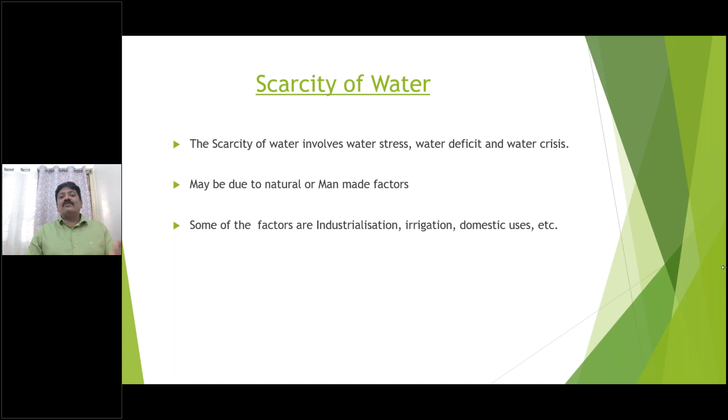Today we are talking more and more about the scarcity of water. Why is this scarcity happening, and what are the remedies? We are going to address these things today. The scarcity of water involves water stress, water deficit, or water crisis. This may be due to natural phenomena or man-made factors. Some man-made factors are industrialization, and erratic use of water in irrigation, domestic purposes, etc.

And I have seen that the water table is falling drastically. Here we have already gone about 1,500 to 1,800 feet below. And though we have completed 5 stages of the Kaveri project, still we are not able to supply water to the whole of Bangalore city, and we have a severe water crisis.

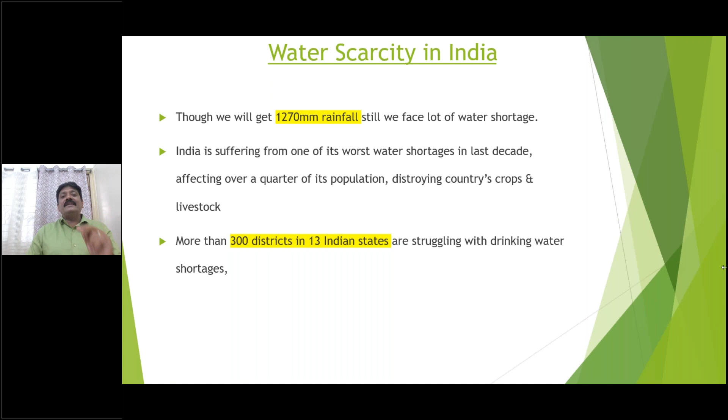In the last decade, India has faced a lot of water crisis, affecting at least a quarter of India's population, destroying crops and livestock. More than 300 districts in 13 Indian states are struggling with drinking water shortage, which cannot be compared when we talk about such water stress. You can see that 54% of India's landmass is under acute water stress.

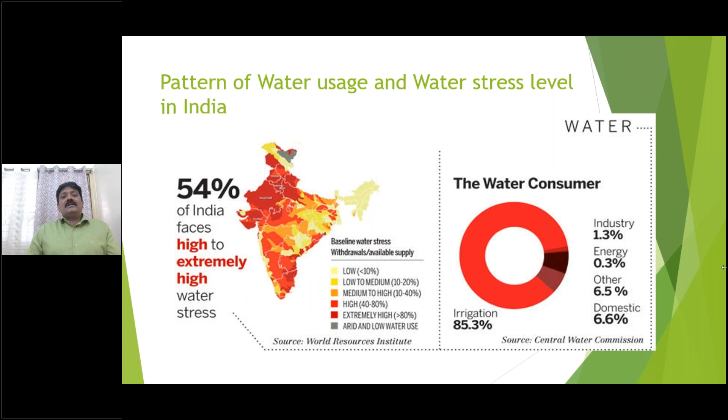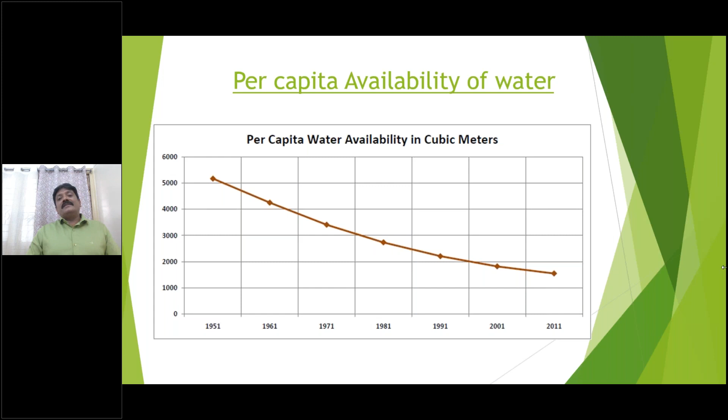If you take per capita availability of water during our independence, we had about 5,000 plus cubic meters of water available per person. But it has been continuously decreasing, and by 2011 and 2017 it came down as low as about 1,500 cubic meters. Anything below 1,000 cubic meters is a distress level, and it will lead to a lot of water crisis throughout the country.

What are the reasons for water scarcity in India? Though we are getting 1,270 mm of rainfall, what is the reason we are facing this?

You will be surprised to know that of all the rainfall falling on the land in India, with all our dams, tanks, and ponds put together, we are only able to save 35% of the water that falls on our land, and 65% of the water goes to waste. That is because we are not able to manage this water, and due to over-exploitation of surface and groundwater. Also, due to rapid construction, we have reduced all the traditional recharging structures.

In agriculture, which uses the largest amount of water, 85% of fresh water is used by agriculture. And they are using this water inefficiently with furrow irrigation systems, where flooding of water leads to wastage.

And what has happened is, whatever water is left in the ponds, rivers, and lakes, we have polluted them by draining all the waste products into the water, along with water treatment effluents into the fresh water, and discharging chemicals from industries.

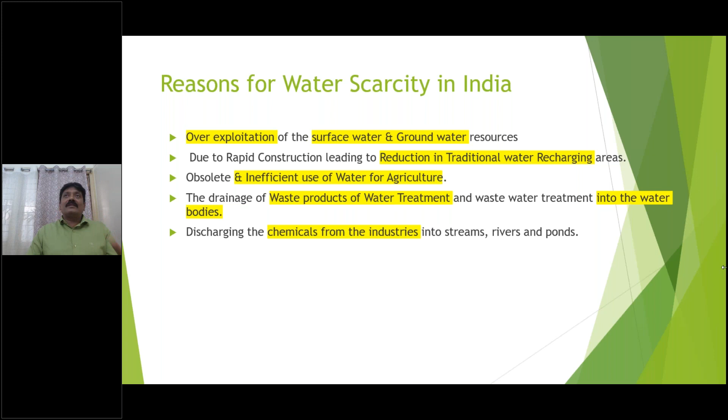You must have seen a recent news story that went viral worldwide: a lake on fire. Unfortunately, it was from my place, Bangalore, because a lot of effluents were sent into the lake, and the lake caught fire. This is the kind of misuse and abuse we have been doing with fresh water.

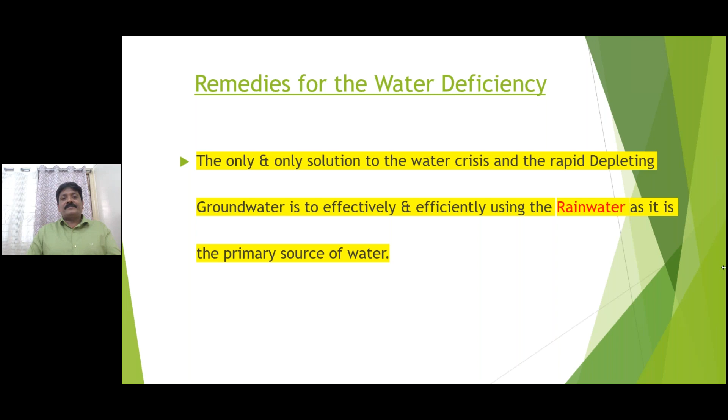For all this water shortage problem, the only solution is to use rainwater, because rainwater is the only primary source for all the water in the world. So, in case we want to make the country water surplus, or at least water positive, we have to take up rainwater harvesting on a massive scale. Each and every house should adopt it at a massive scale.

Though rainwater harvesting has been made mandatory by many states, people have not taken it seriously because they have never seen rain as a source of water. They have not thought that rain is a resource for water, so they have failed to adopt rainwater harvesting. In many places, people have found shortcuts just to show it to the authorities so that they can save on fines.

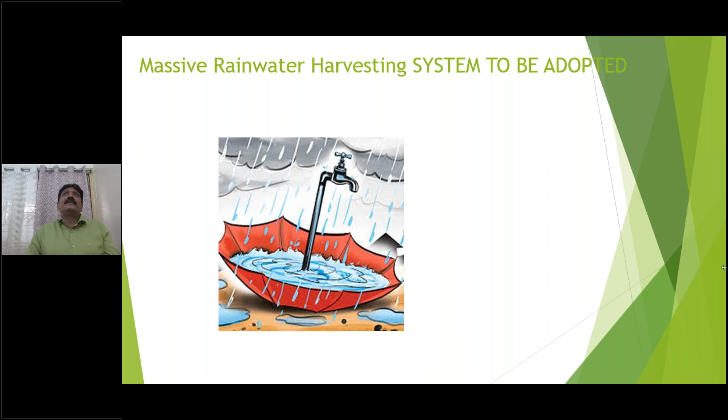But if they can adopt rainwater harvesting, I will tell you the benefits of adopting it, how it can benefit a person, a country, and the mother earth as a whole. Just to give you an example of how much rainwater potential there is, in Bangalore we get about 1,250 MLD of water per day from the Kaveri river.

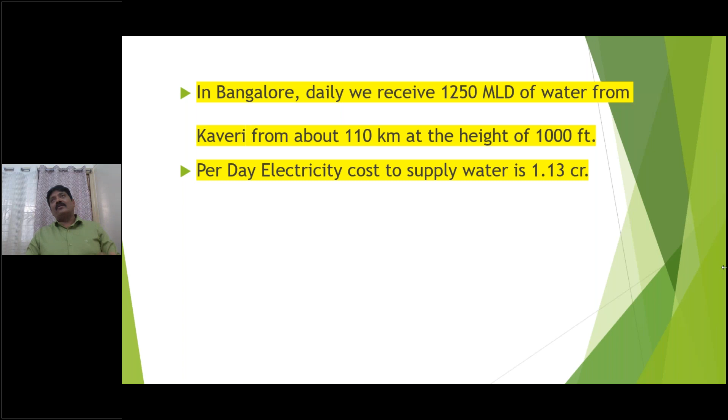This water is pumped from about 110 kilometers away, at a height of 1000 feet. We are about 1000 feet above the source of our water. Per day, the electricity cost to supply water to Bangalore is 1.13 crores.

But just to give you an example of the potential of rainwater, let's assume we cover the whole of Bangalore with a plastic sheet, and the water that falls on it is collected and stored in ponds. You must have read that Bangalore was once called a city of lakes. We had more than 1000 lakes, and today we're left with only 97.

This is not only for Bangalore. Any city, even getting just 500 mm of rainfall, if able to collect, store and recharge its rainwater, will be able to supply water from that source alone. You need not supply water from a long distance, spending huge capex on infrastructure, maintenance, and power bills. All this could have been saved and used for a better purpose, if we understood the importance of rainwater.

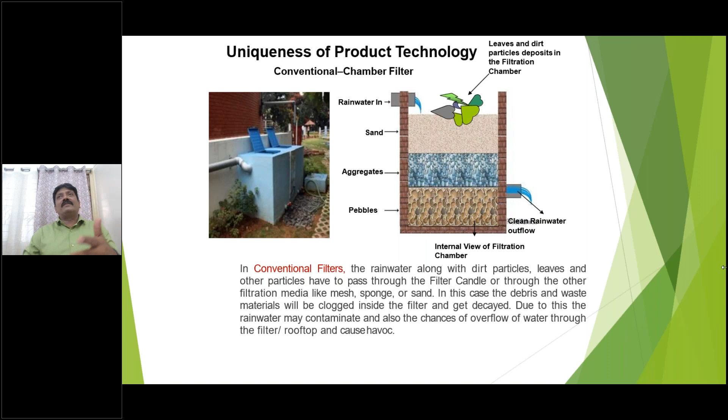Rainwater harvesting is actually a very simple process for a house. We need to interconnect all the downtake pipes and connect them to filters available in the market, which are self-cleaning and maintenance-free. After filtration, this water can be let into any underground sump, bore well, or open well you have.

It's as simple as this, and you'll be surprised to know that for 1200 square feet of roof area, the whole installation cost, including plumbing, pipeline and the filter, may come to about 20,000. If you take the average annual rainfall of India, about 1270 mm, annually we'll be able to collect about 1,20,000 liters of water, which can reduce stress on municipal supplies.

Imagine if we could have saved that much water, how much we could have saved on the water bill. As an individual, we could have saved on the water bill, and that much water wouldn't have gone into the storm drain.

Just to give an example of how urban flooding happens, let's assume a street with 20 houses on one side and 20 on the other, each with about 1200 square feet of roof area. For just 25 mm of rainfall, or 1 inch, one house will yield about 2400 liters of water.

If that 2400 liters per house is let into the storm drain without being harvested, one side of 20 houses comes to more than 48,000 liters, and the other side another 48,000 liters. In one street of just 40 houses, that's around 1 lakh liters - imagine the colossal quantity of rainwater getting wasted. This goes to low-lying areas, causing loss of lives and property.

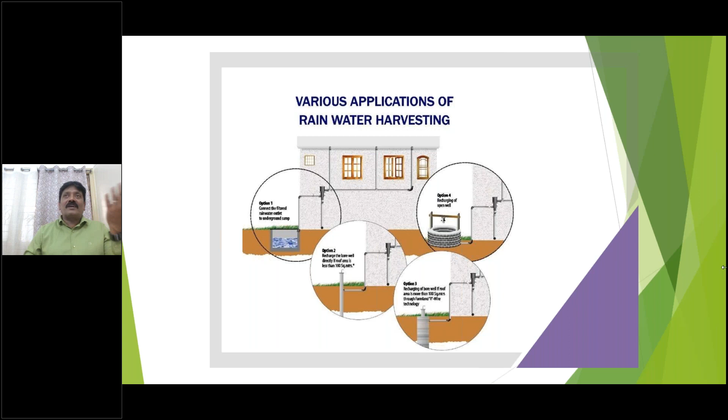It is a simple installation. We just need to interconnect all the downtake pipes, bring it together, and install any of the self-cleaning filters, any good filters available in the market, and allow the water to be stored. The quality of this water, compared to any other water on earth, is the best water. This water can be stored if you filter the rainwater and don't allow sunlight and air to interact with it.

This water can be stored for a minimum of 100 years. I say minimum 100 years because that is the known time for which water was stored and remained potable. One haveli in Jaisalmer was locked for 100 years, and when they opened it, they found water still in the tankas below.

If you take the Jaisalmer, Rajasthan desert area, and the Kutch area of Gujarat, every house there has a tanka below their kitchen. All the rainwater that comes, they collect it, filter it, and store it in their tankas, using it for drinking and cooking because they don't have any other perennial source of water.

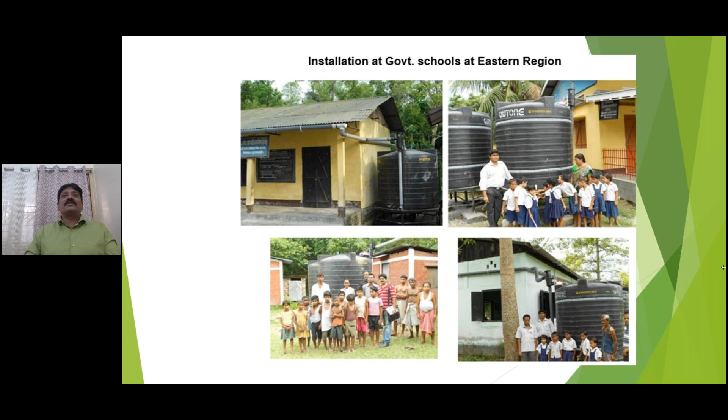When the water from that haveli, closed for 100 years and then opened, was tested, it was still in potable condition. That is the reason I'm telling you rainwater can be stored for 100 years in potable condition. You'll have observed that water retrieved from borewells is millions of years old—that is fossil water. In fact, that is still good; they say it's the best water to drink.

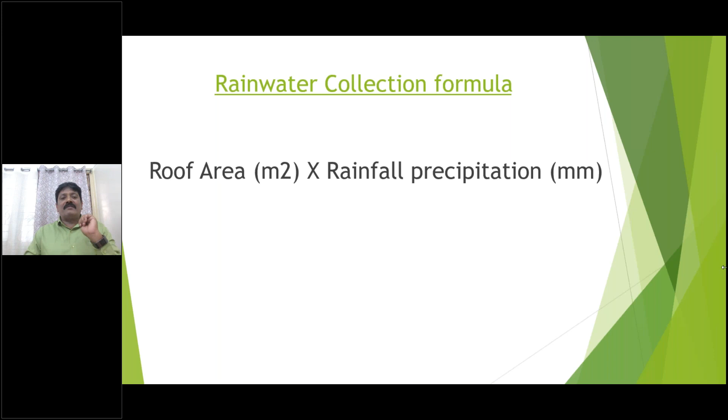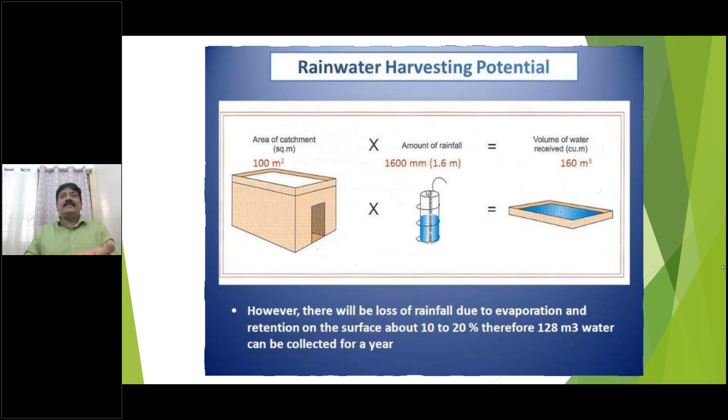Now, for a layman to understand, let's see how much water comes onto my house. It's a very simple formula: calculate the roof area in square meters and multiply it with the precipitation of rainfall, which you can get from the meteorological department or Google, since many sources are available today. Take the catchment area of your roof and multiply it with the rainfall, whether per hour, per day, or per year. This gives you the amount of water falling on your roof and going to waste.

So you'll understand how much precious clean water is going waste from your house alone. Even without installing huge underground sumps, just using the existing facilities in your house, you'll be able to save more than 35 to 40% of your annual water requirement. Anywhere on earth, with minimum investment and without extending your storage capacity, using whatever storage you already have, you can reduce your consumption by a minimum of 35 to 40%.

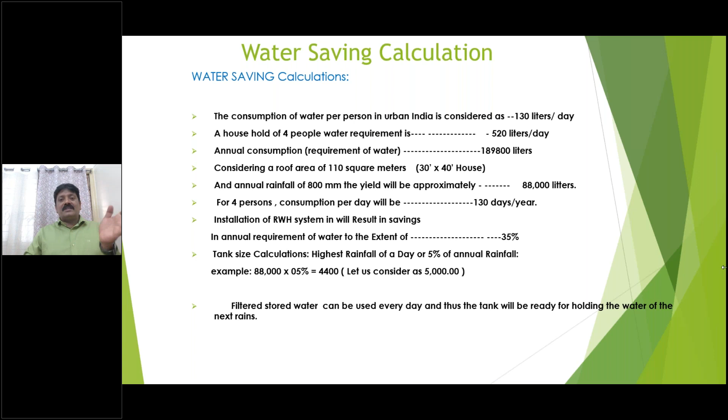In Bangalore, there are many houses that don't depend on grid water at all. They don't have borewells, nor do they buy water from the municipalities—they just live on rainwater alone. If they can do it, probably everybody can do it. We just need the determination to do it.

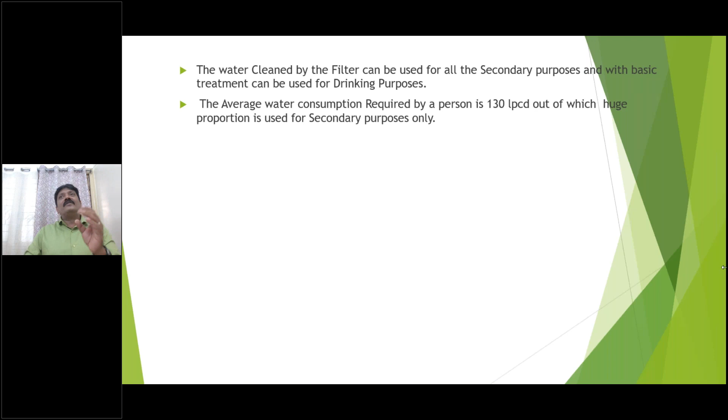There are many other ways we can save water at the individual level, because I'm talking to all of you today about how we can save water individually. The foremost important method is rainwater harvesting, which we can do with just a small investment of as low as 20,000 rupees for a house. If you're building a new house, you can also go for grey water usage for flushing. What's happening is, per day per person, we use about 40 liters of water just for flushing alone.

This is drinkable quality water which is coming in your tap, which you are using for flushing, which is a crime. We could have used all our bathing water, the water from your washrooms, your hand wash water, and your washing machine water. With simple changes in the plumbing system, this could have been used for flushing, giving one more lease of life to this water.

In bigger apartments, this gray water mixes with the sewer water, and then the whole STP capacity has to be increased. STP is sewage treatment plant. With that, capacity has to be increased, so there is a lot of consumption of chemicals and power, and this water is getting wasted.

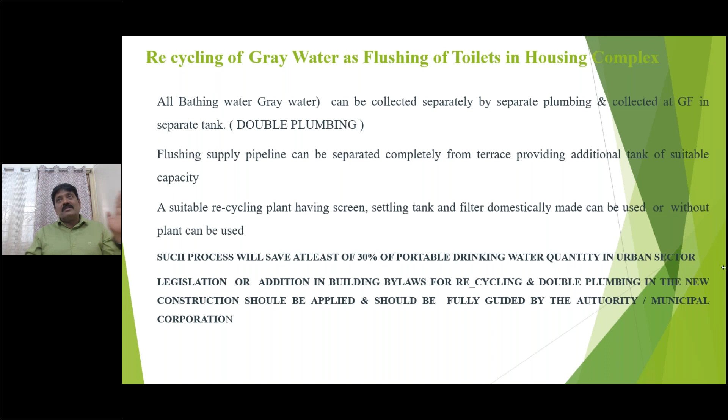Instead of that, if you could keep the sewer water line separate and the gray water line separate, you could give one more lease to that water, and this can reduce huge cost in treating the water, majority of the cost. This will also reduce your consumption, because on average, international standards say we consume about 130 liters. If you remove about 40 to 45 liters, you're left with only 90 liters of water to be used.

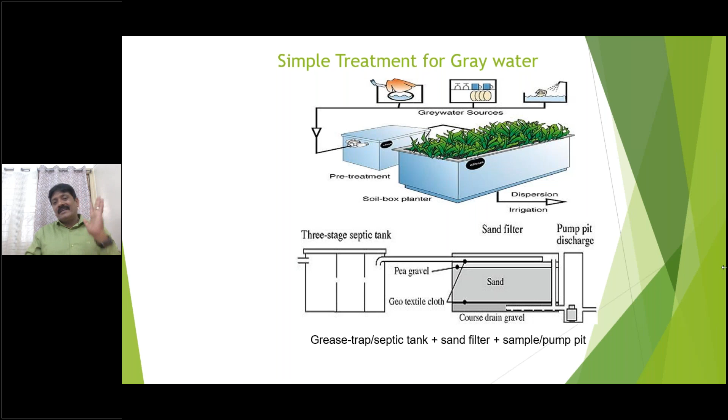This can be used for your flushing as well as your gardening. Then you don't require a very high sophisticated filter. A simple activated carbon charcoal filter will take care of the cleaning, and this water can be used.

One more simple thing we can do tomorrow morning is adopting aerators for all the existing taps. What happens is, in the taps, there is huge water wastage. Particularly in apartments, if you have a 10-storied apartment, the pressure will build up by the time you come down, and the water will be gushing out of your tap as soon as you open it.

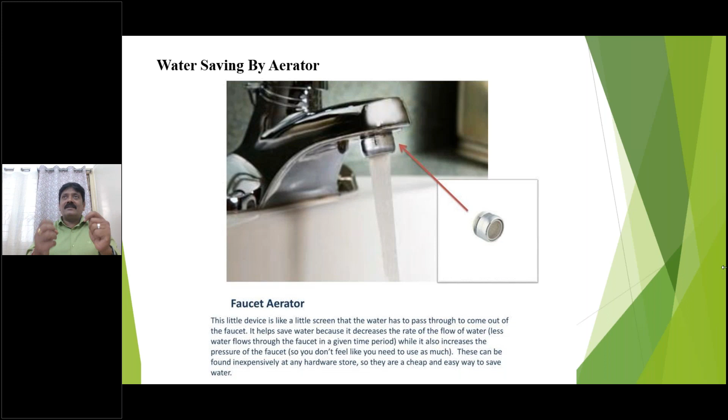So what you can do is, there are a lot of aerators available today which take air and mix it with water, reducing your water consumption in a very big way.

These are retrofit, and can be installed on any of your taps, particularly your kitchen taps where the maids wash utensils. It's common practice in everybody's house that the maid will leave the water running, and by the time she enters the kitchen, starts cleaning, and goes out, the tap will be running full this whole time.

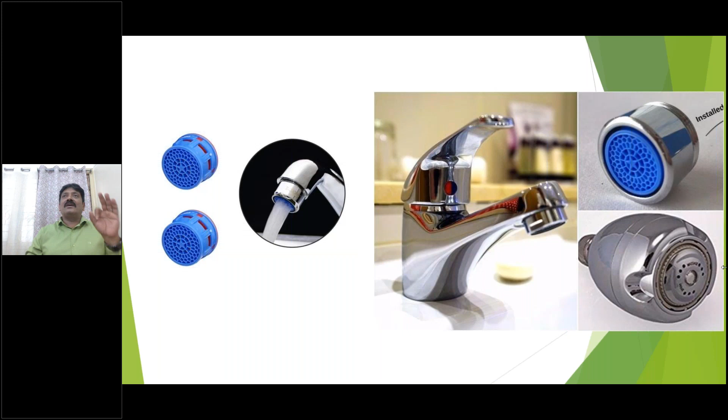So we can adopt aerators there, and in our showers too we can take shorter showers. You can see the difference here: a tap without an aerator will use 15 liters of water in 1 minute, whereas if you install a small aerator costing about 45 to 60 rupees, only 3 liters of water is used. So you are using 80% less water, and you won't even feel the difference.

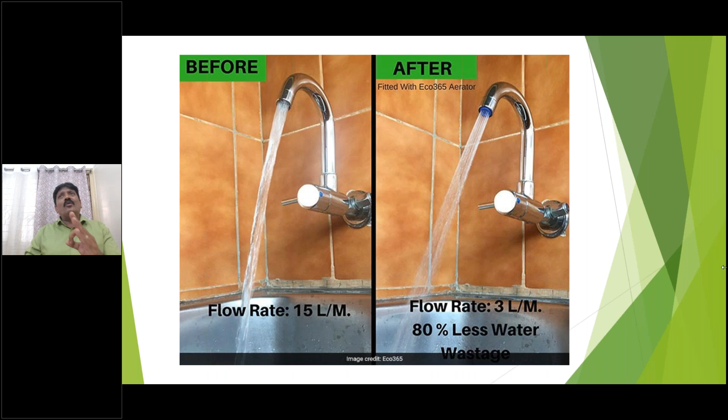It's not that your hands won't be washed properly; you'll be able to wash your hands in the same manner as with 15 liters, because we only require that much water to wash our hands. The rest of the wasted water that would have otherwise gone down the drain can be arrested, and this will go a very long way in saving your water bills.

Second is taking up the permeable pavers. If you just go outside and look around, each and every inch of available land is covered with either tar or paver blocks. There is no place for the water to percolate into the earth at all.

It is unfortunate that even school grounds these days use paver blocks or synthetic mats to cover playgrounds. It's so unfortunate - we call ourselves the most advanced in terms of technology, but it's unfortunate to tell you that our forefathers were more literate in water literacy than we are today.

If you see, each and every temple has a temple pond. There were so many open wells, so many kalyanis. They knew so much about water saving, which we have forgotten today. This is only in the last 30 to 40 years that we have gone to this extent.

If you take borewell culture in India, it started in the late 60s and early 70s, and we thought that borewells were infinite. Today, after 40 years, we are coming to know that this is not true.

In my place, Bangalore, out of 10 borewells drilled, we get water in only 4 borewells, and that too at a depth of 1,500 feet. Cost of drilling a borewell alone comes to about 3 lakh rupees. Imagine if you don't get water in that borewell, what is the status of that person? Out of the 4 borewells where we get water, in the first year of operation, 2 borewells dry up. So our strike rate of water has come down to as low as 20%, and this scenario is everywhere.

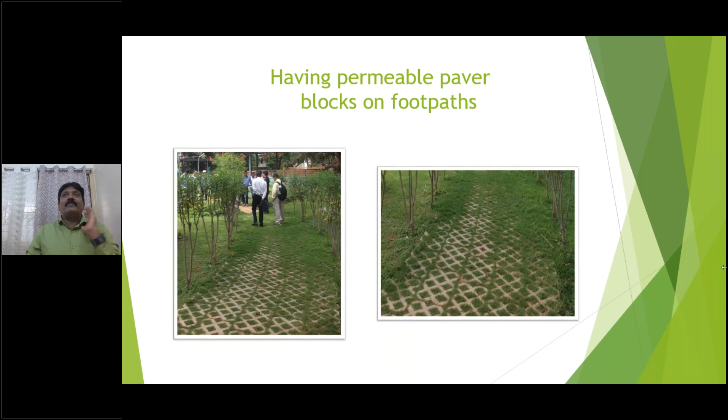Even in the Gangetic belt, where we had water at a sub-shallow level of 10-20 feet, today the water is at 200-300 feet. This is happening in every city. In the Gangetic plains, where we would have never dreamt of seeing tankers, today you can see many tankers going around. So slowly we are getting into a phase where we'll have a water crisis.

These are a few small methods which we can use in our houses to save water, thereby reducing our cost of water as well as doing a human service to Mother Earth.

In India, about 75% of our population is somehow directly or indirectly connected to agriculture. And out of the fresh water used in this country, more than 75% is used for agriculture, because of our practices which are not in favor of conservation.

Power is generally given free to all the farmers. So what they do is switch on the borewell at night and go, and the whole night, as soon as power comes, the borewell will run until morning. When he comes back the next day, the water will still be flowing, or until the government stops the power. So throughout the night they just allow the water to do furrow irrigation. By furrow irrigation, even though the plants don't need water, the water keeps flowing, because he is not bothered about doing the best irrigation practices.

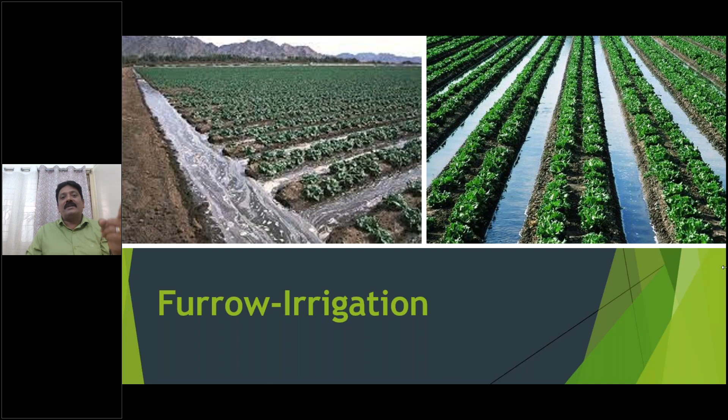That being the case, it is not only spoiling the water, but it is spoiling the soil also, and the productivity of the farmer is coming down.

So what we can do is, like Israel did, go for drip irrigation and sprinkler systems, which will reduce consumption by more than 60%. After the green revolution we had lots of challenges for food security, but today we are facing the water security of the country, and this water security will lead to the food security of the country also.

If we don't have water, how will we grow crops? By putting a lot of water, we are destroying the soil, and that will lead to a reduction in the crop. So it is all interconnected — water is interconnected, and everywhere water is needed.

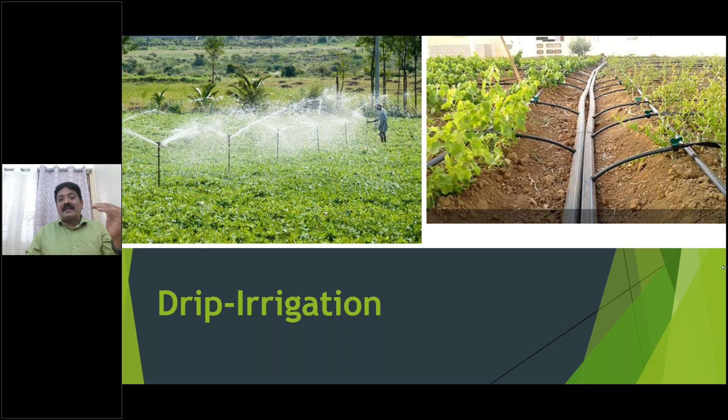In our body also, like in the Panchabhutas, water plays the second place. Out of these 5 elements of life, water is in second place. So water is very important, and a lot of improvements have been done today, wherein you just have to water the root zone.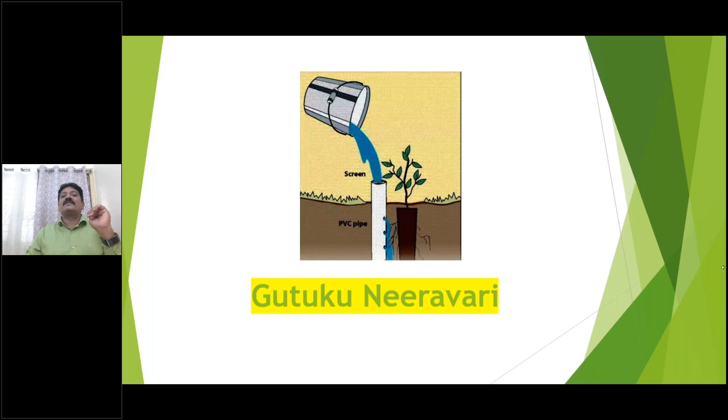We can also have farm ponds in every farm. For 1 acre of land, just 25 mm of rainfall brings 1 lakh liters of water onto the farm. Out of this, hardly 20% percolates because of the clay mix soil at the top. And second, if you see over the last 10 years, the intensity of rainfall has changed because of climatic changes.

Because of that intensity, in a short span of time there is a huge spell of rainfall. All this water will flow off, because only when the water is falling slowly can the earth take it in. Water in the earth moves by capillary action, from higher concentration to lower concentration, very slowly. It is not that it will flow like it goes in a pipe.

So if you can have farm ponds and save this water, for those many days at least you will not need to take water from the deeper aquifer. We can save this water not only by storing it, but also by stopping it with check bunds. By doing that, we see that the topmost fertile soil, which is hardly 8 inches, is stopped from flowing away. So this is a dual system, wherein you save the water and also save the precious topmost fertile soil.

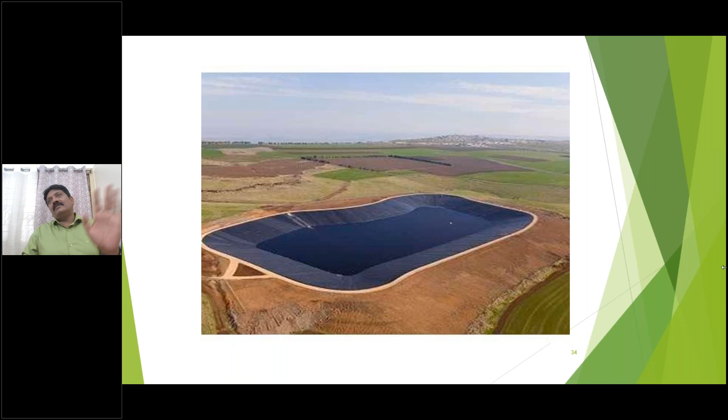Now a lot of technologies have evolved in the last 10 years, wherein you use farm ponds with high density polyethylene liners, which are then closed so that evaporation losses and percolation losses are avoided. Then you can get one or two crops from this stored rainwater alone.

Apart from that, whatever traditional dug wells or open wells were there, we have forgotten them completely. In my childhood days, it was only the open well from where each and every person used to remove water, either for drinking or irrigation, and they were used to it. So what has happened is, after the advent of the borewell, we have completely forgotten these open wells. We have made them into waste pits, or we have closed them.

Now, how important are these open wells in saving water? What happens is, after one or two rainfalls, the whole subsurface gets saturated, because we are not removing this water from the subsurface, we are just removing water from the deeper aquifer through the borewell. Earlier, there were open wells everywhere, so people used to remove water from these wells, and the subsurface water would get emptied. So again, the subsurface would be ready to take the water inside it.

That is one of the major reasons even villages are getting flooded today, because we have stopped using this subsurface water.

And let me tell you friends, subsurface water is the purest and softest form of water, because as we go deeper in the borewell, the quality of the water deteriorates. There are a lot of salts, hardness increases, salinity increases, there will be arsenic, fluoride, all these things. But well water is the softest water, which is required for your farm as well.

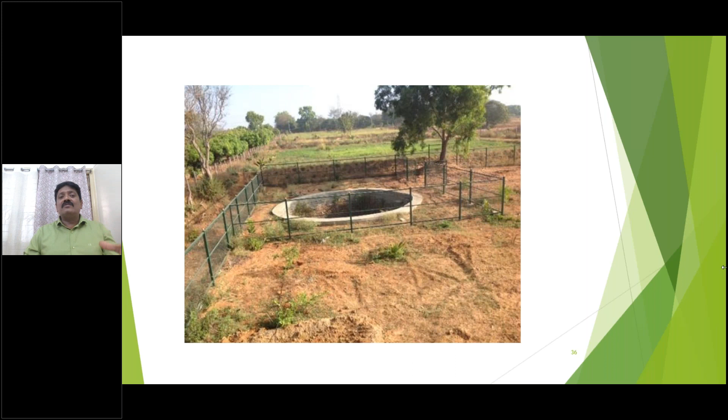So we should advise farmers to have these open wells and farm ponds, which give fresh water, helping their crops and increasing productivity too.

And one more thing, these are the Kalyanis. If you see, each and every temple had a temple pond. But today, if you go to any temple pond, it is either closed, or a lot of muck is lying there. As I told you earlier, our forefathers were so water literate, they knew how to save water. That is how they used to save it, and this was a reservoir in case of drought.

So we should see that all these Kalyanis can be rejuvenated. This is one of the Kalyanis which was more than 150 years old.

This was personally rejuvenated by me on the last World Water Day and inaugurated. If I had shown you the picture of what it was before, and what we made with the help of the Rotary Club Bangalore Basavanagudi, you'd see we rejuvenated it, and today it is full of water. And believe me friends, today it is such a recreation spot.

As you know, water gives such positivity. You go and stand there, why do we go visit all the beaches and seas? Because water, we are connected to it, since 70% of our body is made up of water. So there is a connection. As soon as we see a water body, we feel so positive, that is the connection we have with water.

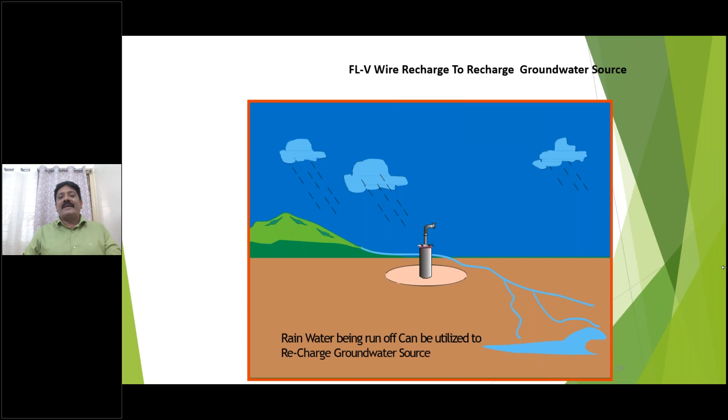And we can even recharge the borewells. We have been digging borewells and forgotten to recharge them. That is the reason borewells are drying day by day. We can recharge these borewells in a big way.

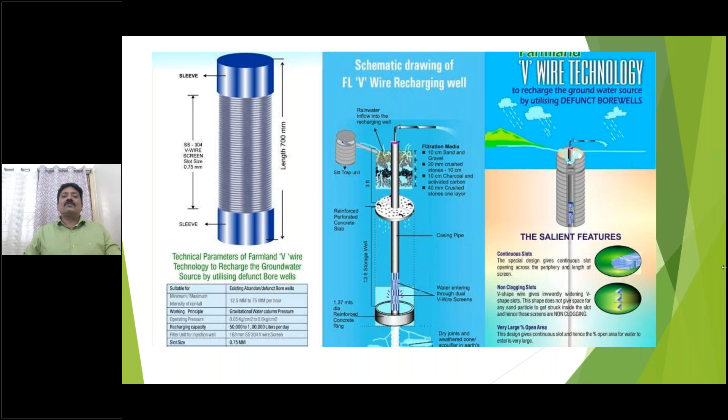We can use this water with different technologies available, like V-wire injection wells, which can be used to recharge the borewell, so all the runoff rainwater can be recharged into the borewell, and the borewell can be rejuvenated. We can improve not only the quantity but the quality of borewell water, because of dilution, since rainwater is the purest and softest form of water. We let this water in after filtration. If it's roof water, you can allow it directly into the borewell, or if it's surface water, you go for the injection well technology, where beside the borewell you bypass the overburden of clay and the non-permeable zone, go to the first permeable zone, and leave the water there after filtration, not into the aquifer itself. This can recharge and rejuvenate our dried and depleting borewell.

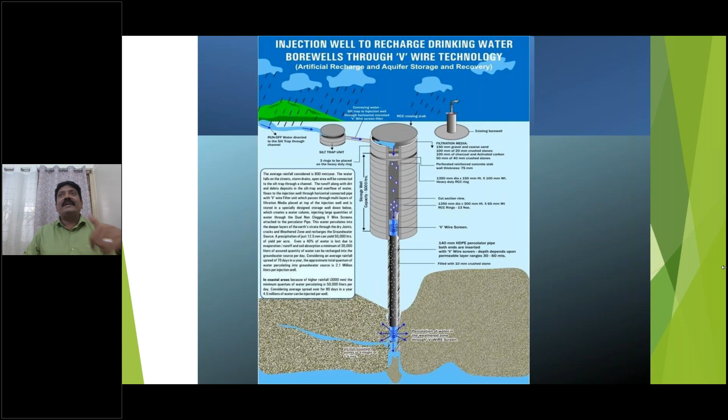Whichever borewell was giving water, if we adopt scientific technology, we can rejuvenate it back and give life back to these borewells.

In this picture you can see the water otherwise would have gone down because of the gradient, flowing away. This is the borewell where my cursor is, and this whole water wouldn't have recharged this borewell at all, because whenever it rained, all the water would have flowed down due to the gradient.

Now, by adopting these innovative technologies, you can see we have made a silt trap here, and all this water is allowed to percolate into the ground to the first permeable zone. Thereafter, it gets filtered through the earth's crust, and this recharges the borewell.

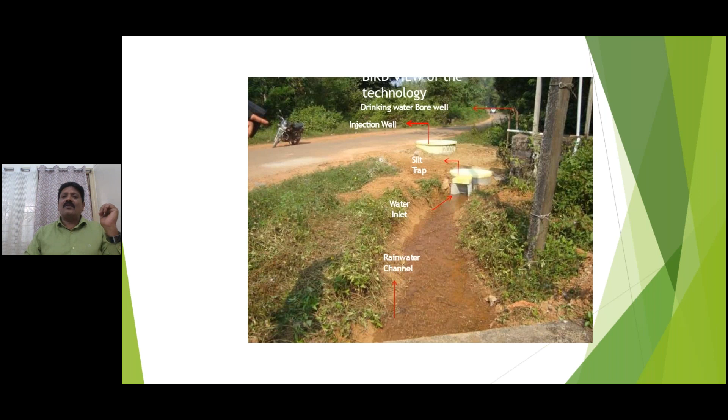So the government is taking a lot of initiatives to save water. Today even our Prime Minister is stressing on saving water. 'Har Boond Bachao' is the slogan given by our Prime Minister, and they constituted a separate ministry, the Jal Shakti water ministry. Today they have earmarked 21,000 crores just to save water under the Jal Jeevan mission, to supply water to everybody, to save water, to rejuvenate all the water bodies, and under Atal Bhujal to recharge the ground, they have earmarked about 4,500 crores.

So the government is taking a lot of initiatives, but it's not only the government that can do this. It has to be a vast movement where each and every one of us joins hands to save water. Only then can we prove wrong the surveys which say India will be one of the top 5 countries that will be water starved. We can prove them wrong if we all join hands together and save water.

They have made it mandatory everywhere in industries that not even a single drop of rainwater can be let outside. Each and every industry has to be zero discharge. They cannot allow rainwater to go out; either they have to reuse the water or recharge it. So that has been made mandatory.

And if you come to my place, Bangalore, they have made it mandatory that any house more than 2,400 square feet, even old houses, need to have rainwater harvesting. If you don't do rainwater harvesting, for the first 3 months they fine you 25% of your water bill, and in the next 3 months they raise this fine to 50%. In the last 3 months they have collected more than 15 crore rupees as fines.

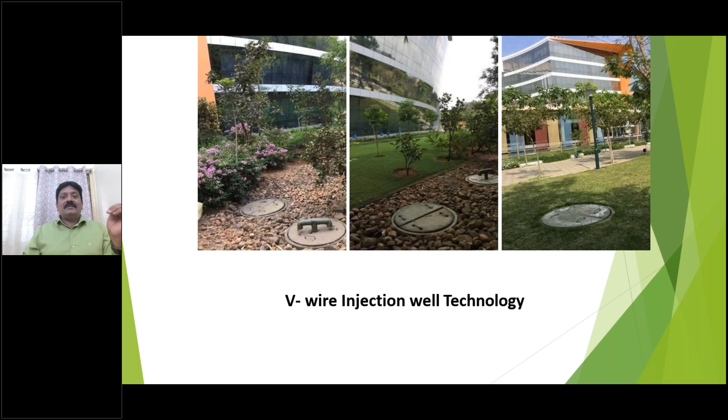So I am coming to the end of this, because I want this session to be more interactive. I have tried to cover the major reasons why we should save water. It is also our social responsibility. As human beings, we have to remember, as they generally say, we have not inherited this earth, but borrowed it from future generations to come. Our forefathers left this world beautiful for us, and we have to leave it beautiful too, because we have borrowed it from our next generation.

So as a social responsibility also, to safeguard the future generation, what is the point in me building a beautiful house with all the beautiful things, and then next day morning my child, when he goes and finds that there is no water?

You must have observed that a lot of civilizations in this world have been wiped out because the water was not there. You take Indus Valley civilization, you take Mesopotamia, you take Nile Valley, you take many others world over, if you go and see.

So many civilizations vanished because they were not careful about their water management. So taking this to the end, I want to request you one thing. On this World Water Day, let's take a pledge that in whatever form, if we are able to reduce our water consumption, we'll be doing a human service to Mother Earth.